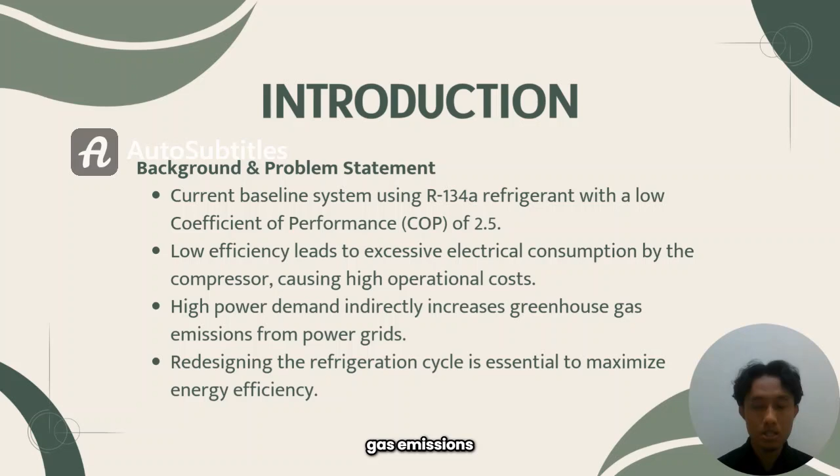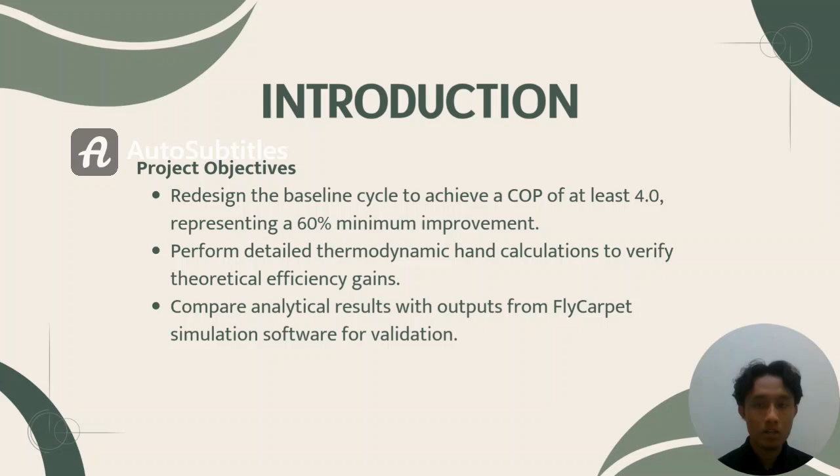Therefore, our project sets out to achieve three core objectives. Firstly, we aim to redesign the baseline architecture using advanced concepts like multi-stage compression and flash economizers to boost the COP to a target of at least 4.0, representing a minimum of 60% efficiency improvement. Secondly, we will perform rigorous manual thermodynamic calculations to mathematically verify our theoretical gains. And finally, we will validate these analytical calculations against continuous real-time models using FlyCarpet simulation software. So, with that established, let's look at our design.

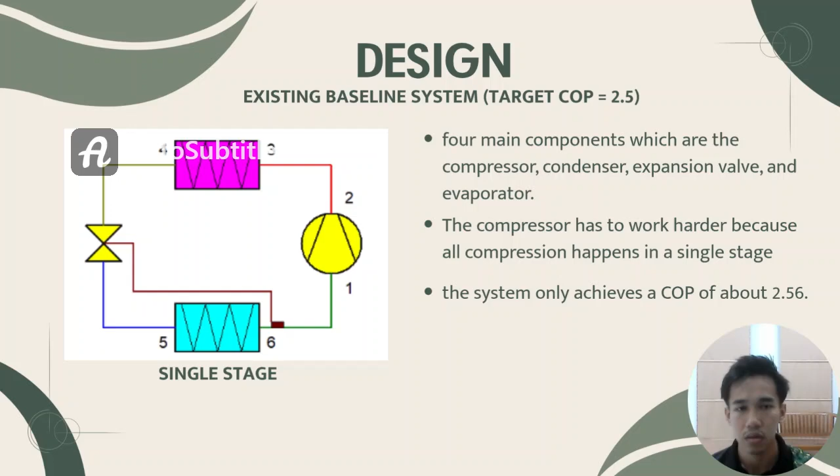To improve the performance, we redesigned the system into a two-stage compression cycle with a flash chamber economizer. The main difference is that the compression process is divided into two stages instead of one. A flash chamber is added between the compressors. This component separates part of the refrigerant into vapor and liquid. The vapor is used to cool the refrigerant between the two compressors, which reduces the work required by the high-pressure compressor. At the same time, the liquid refrigerant becomes subcooled before entering the expansion valve. This increases the cooling effect inside the evaporator.

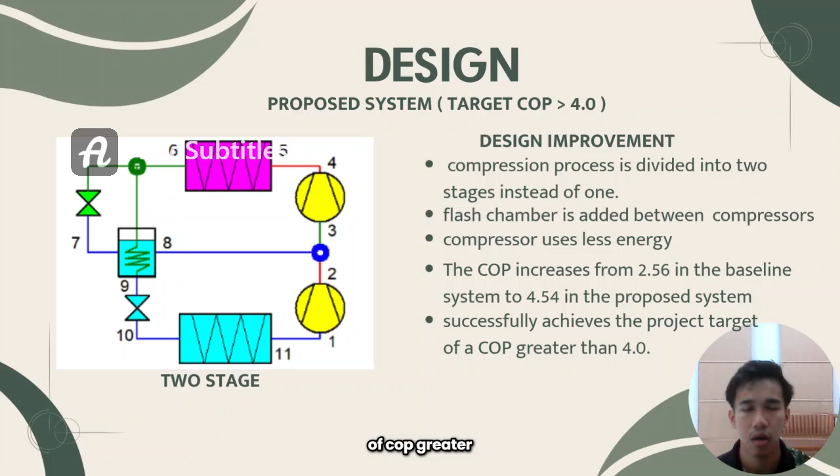With the design improvement, the compressor uses less energy while the evaporator provides more cooling. This combination significantly improves the system efficiency. The COP increased from 2.56 in the baseline system to 4.54 in the proposed system, which is about 77% improvement. Therefore, the proposed design successfully achieved the project target of a COP greater than 4.0.

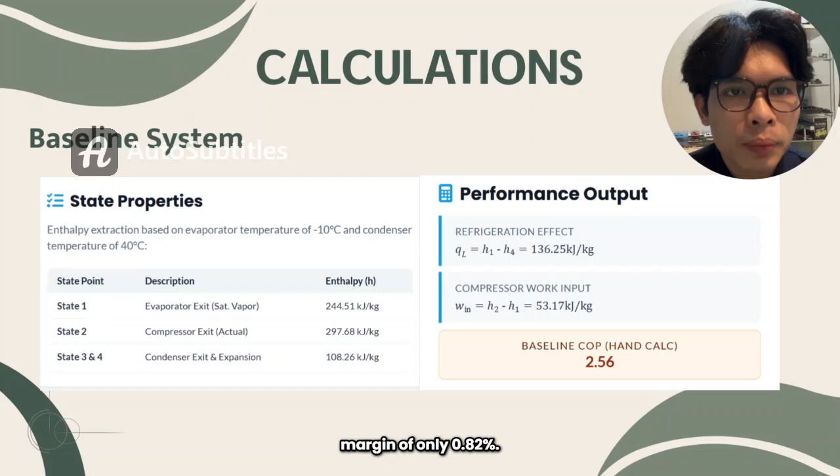My matric number is CD240106, and now I'll show you our calculation that validates our design. We analyze both the baseline and our proposed system using a cooling capacity of 1 kilowatt operating between -10 and 40 degrees Celsius. For the baseline system, our hand calculation shows a refrigerating effect of 136.25 kilojoules per kilogram and compressor work of 53.17 kilojoules per kilogram. This gives us a baseline COP of 2.56; when compared to the FlyCarpet simulation value of 2.539, we have a very minor error margin of only 0.82%, validating our baseline model.

For our proposed two-stage system with an economizer, we introduce an intermediate pressure of 0.45 megapascal. Due to the flash separation, the vapor fraction is 15.4%. The total power input for both the low pressure and high pressure compressor is reduced to just 0.22 kilowatts. This results in a calculated COP of 4.54, which is a massive 77.3% improvement. The simulation yields a COP of 4.01, meaning both methods successfully crossed our project target of 4.0.

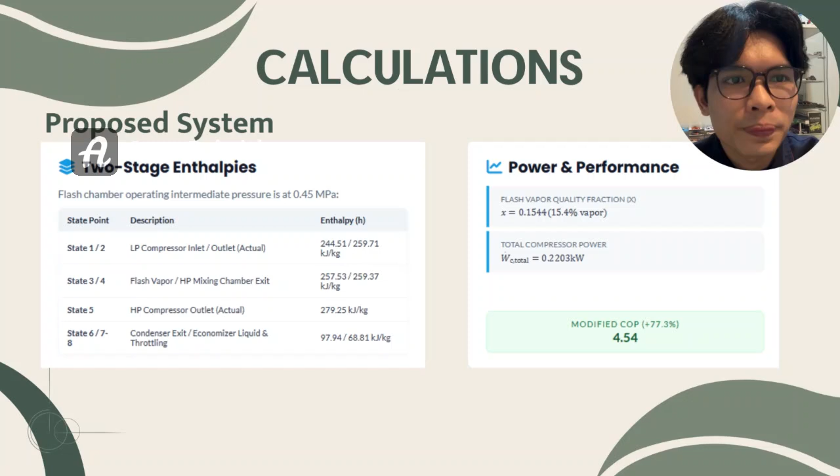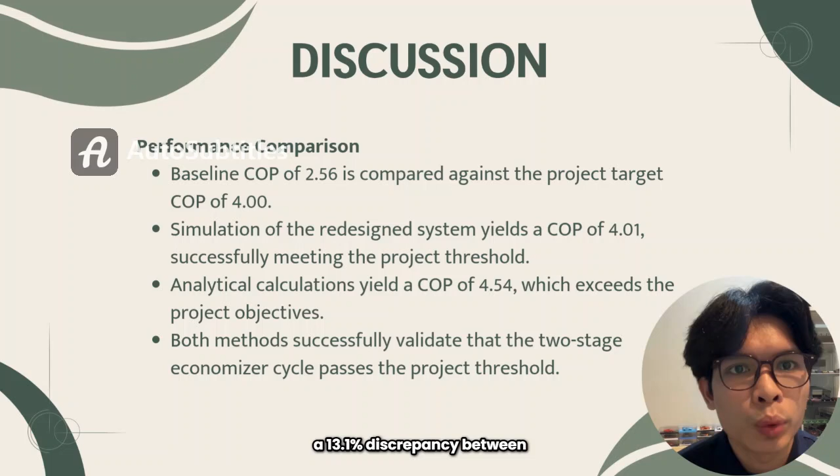Moving on to the discussion, two main thermodynamic mechanisms drive this performance jump. First, the intercooling effect, which cools the superheated gas between the compression stages, significantly lowering the compressor work. Second, the subcooling effect, which shifts our evaporator inlet state to the left, drastically reducing flash gas and increasing our net cooling capacity. We did observe a 13.1% discrepancy between our manual COP and the simulation. This is entirely acceptable and is caused by manual rounding during double linear interpolation, whereas FlyCarpet uses continuous real-time NIST equations. In summary, both our analytical and simulated results prove that this two-stage modification successfully meets and exceeds our performance goals. Thank you.

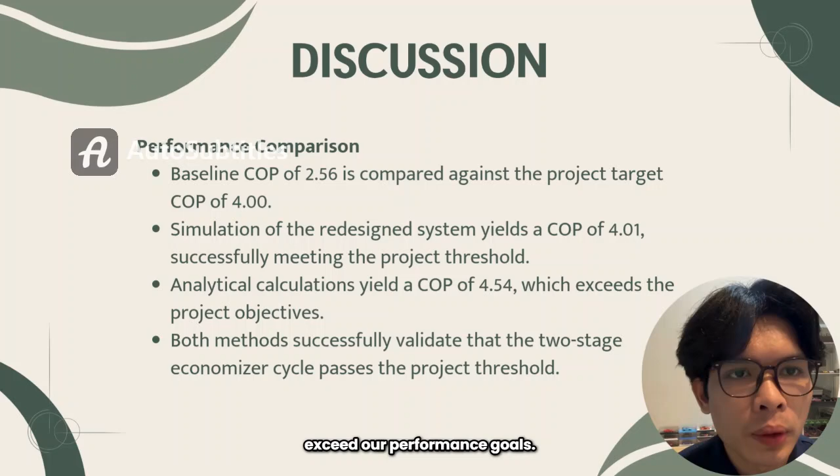Now, to wrap up our presentation, we have demonstrated that implementing a two-stage cycle with a flash economizer successfully overcomes the strict thermodynamic limits of traditional single-stage systems. This architectural modification delivers a substantial reduction in throttling losses and compressor workload. Importantly, our projected performance gains and ambitious COP targets were fully validated by both our rigorous mathematical calculations and our real-time computer simulations. The alignment between these two methods confirms that the theoretical efficiency is entirely achievable in a practical setup. Ultimately, this redesigned system offers a practical, highly efficient, and exceptionally cost-effective pathway for green industrial refrigeration. It bridges the gap between economic viability and environmental sustainability.